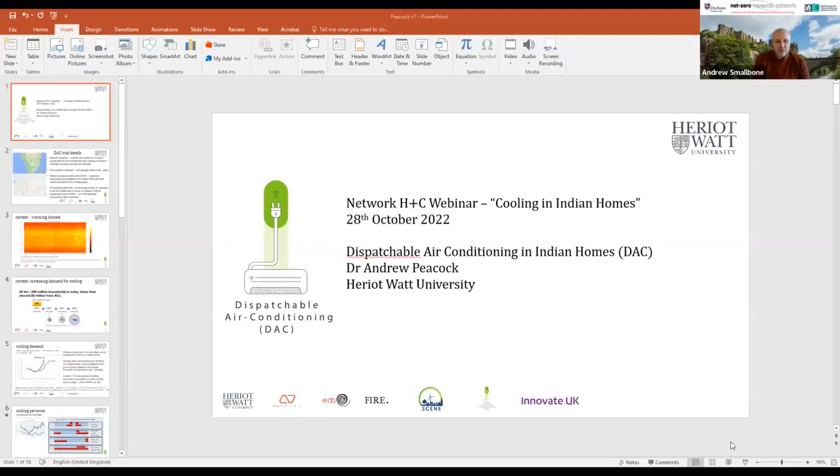We will now move to Andrew Peacock. Andrew is an associate professor in the School of Energy, Geoscience, Infrastructure and Society at Heriot-Watt. His research interests include renewable energy generation, energy management, and energy efficiency in buildings, and he is a co-I of this network. Andrew will be talking about dispatchable air conditioning in Indian homes, DAC, which I thought initially was direct air capture, but it obviously isn't that. It's dispatchable air conditioning in Indian homes.

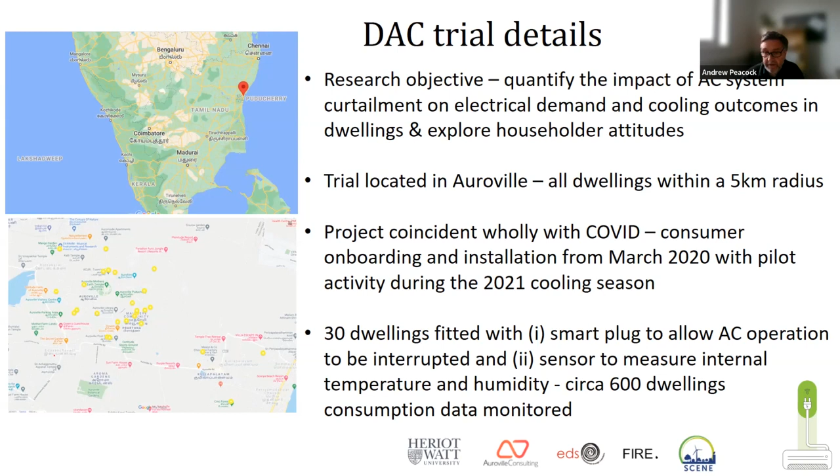Auroville was the location. So Auroville is, for those of you who know India, about a 4-hour drive south of Chennai in southern India. So climate on the coast near Pondicherry, and all 30 dwellings were within a 5-kilometre radius. Just a bit of context, we accessed 30 years of climate data for the region. We were interested in some of the comments coming back from the workshops that we had, that they were seeking to access AC systems because it was just getting too hot. As David says, in this community, the use of AC was eschewed for sustainability reasons, but people were starting to access it because it was getting too hot. So we wanted to analyse that.

What this graph shows is using Moran's environmental stress index. Each box represents a day of the year, and we can see 30 years of data on this. Where it's yellow, it's showing a more extreme environmental stress index. So towards the right hand, from 2014 onwards, we can start to see much more yellow appearing, and that growth in the summertime climate.

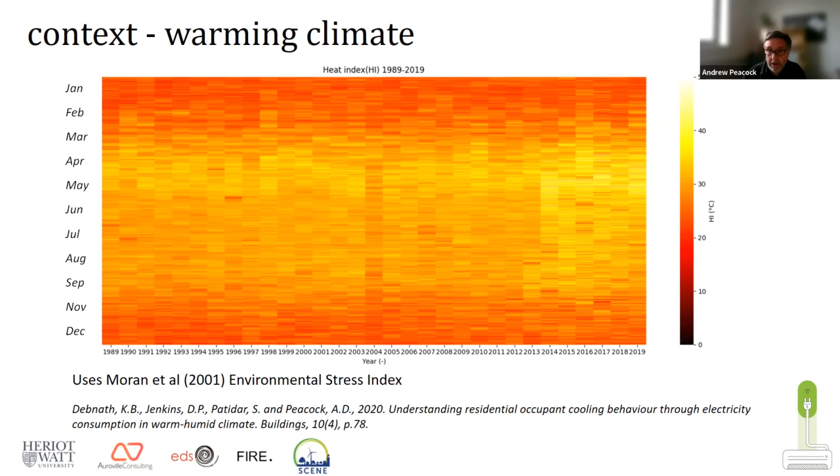So they kind of felt the feelings of people were reflected in how the data was turning out. As David says, the other context is in forecasted massive growth in AC systems. A lot of this stimulated by policy to a certain extent, obviously also by economic conditions. But there are policies in the Indian Cooling Action Plan to try and deliver thermal comfort for all, for instance.

The changing climate in India, to some extent, makes some form of mechanical cooling a necessity in many of the dwellings in India from a health perspective. As you can see, dramatic rises. I mean, just really, really crazy rises that are going to really stress the Indian grid if nothing is done, if it's all fit and forget, if nothing is done to manage rollout of these systems. Obviously, climate is a forcing factor.

We were able to access some data from Delhi here for a single feeder, just to try and understand where AC systems are currently running and how cooling is currently affecting the grid. So this is a single feeder, about 685 dwellings on this feeder, each dot showing average electricity consumption on that feeder. And you're able to discern the monsoon and dry cooling forcing temperatures, different associated with how much humidity is in the air in the monsoon and the dry season. So getting up to around 20 kilowatt hours per dwelling.

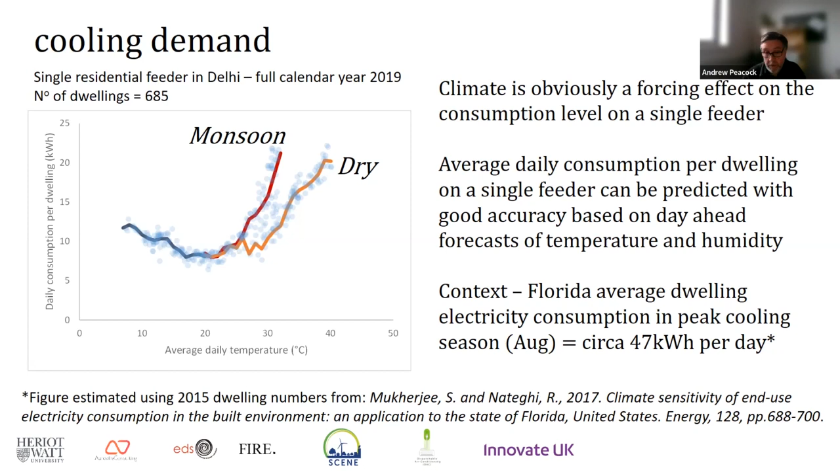So there are many areas in Indian cities where you're starting to see Western style consumption levels, although nothing as big as what we're seeing in Florida, which is shown as a kind of context here. From the data that we analysed from the dwellings that we monitored in India, we were able to start to discern cooling personas, which was interesting to us.

We can see here average dwelling electricity consumption derived from aggregate data, where in March we see very little AC consumption, mainly concentrated around night times, a little bit in the afternoon, and that growing, as one might expect, as the cooling season becomes more severe towards mid-May, which is peak cooling season. We were able to kind of poke about inside these average data to start to see different personas, so how people transition from that onset of a cooling season into peak season.

And we could see these types of arrangements where we had daytime extenders. We had people who extended it from daytime usage to daytime and nighttime. We had nighttime extenders, so they never used it during the day, they only used it to help with sleep. And then we had people who at peak season had the AC system on continually through the day. The middle two, the daytime to nighttime and the nighttime extenders, are the biggest groups.

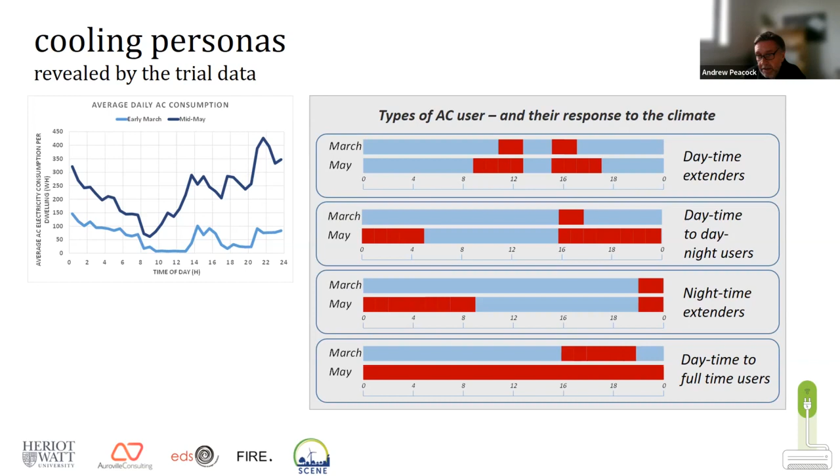So what do we do in our control platform? The curtailment methodology that we alighted upon: we had all sorts of ideas at the outset of this that we would use sort of MPC approaches, where we would be doing a lot of heavy data analysis of incoming data to try and understand how people were using their AC systems and then try and control them almost discretely in each dwelling. That was all made very, very difficult because of data issues associated with using customer Wi-Fi. So we came up with a much more lightweight way of proceeding.

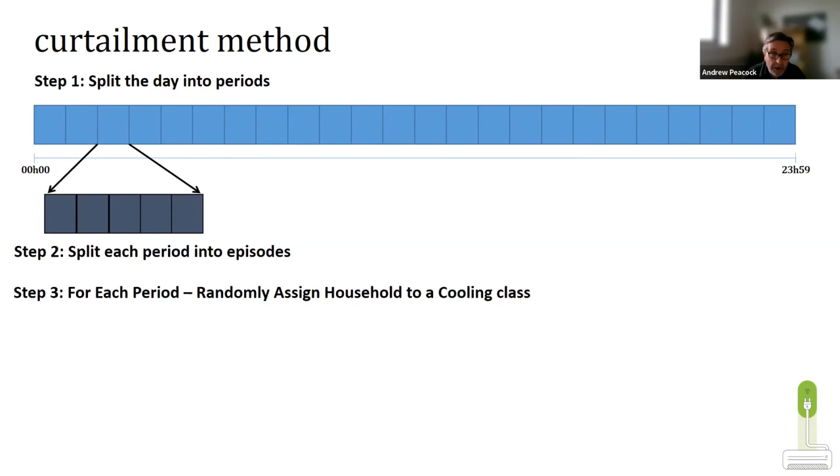What we did is we split the day into periods, and each period then into a series of 5 episodes. And we randomly assigned each household to a cooling class, and each cooling class had a severity of curtailment. We played about with this a little bit, but in the example shown here, we had 3 different cooling classes. The first one had curtailment in 2 out of the 5 episodes. The most extreme one had curtailment in 3 out of the 5 episodes, and cooling class 3 just rode through, had no curtailment at all. The cooling class dictated the severity of the cooling constraint.

In each of the red blocks, we switched the AC system off. We had to analyse how we went about doing this to try and overcome local control management issues with the AC systems themselves. When you switch an AC system off, it cools down for a period of time before you can switch it back on again. So that led to how long each of these episodes were, and therefore how long the periods were.

So analysing the AC systems that we found in the participating residences, we found that an 8-minute period allowed for that cooling down period. So our episodes were 8-minute episodes, and 5 in each period. The periods were therefore 40 minutes in duration.

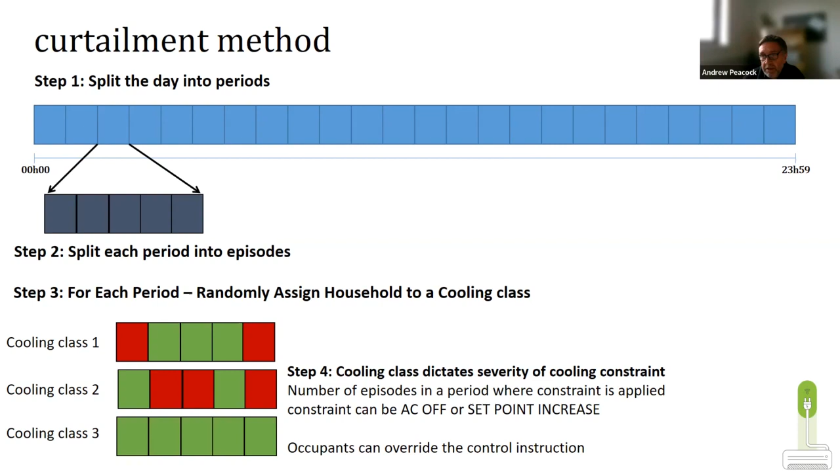Auroville is, as David mentioned, an intentional eco-village. It's invested heavily in PV systems in its grid, and during the daytime, when there was a lot of PV generation on the go, the grid got pretty dirty. So we got a lot of voltage instability, and many of the AC systems that were installed with inverters had voltage management on them. So they were effectively self-curtailing when the voltage went outside certain limits. So we were unable to discern the extent to which that curtailment was because of what we were doing or because of what the grid itself was imposing.

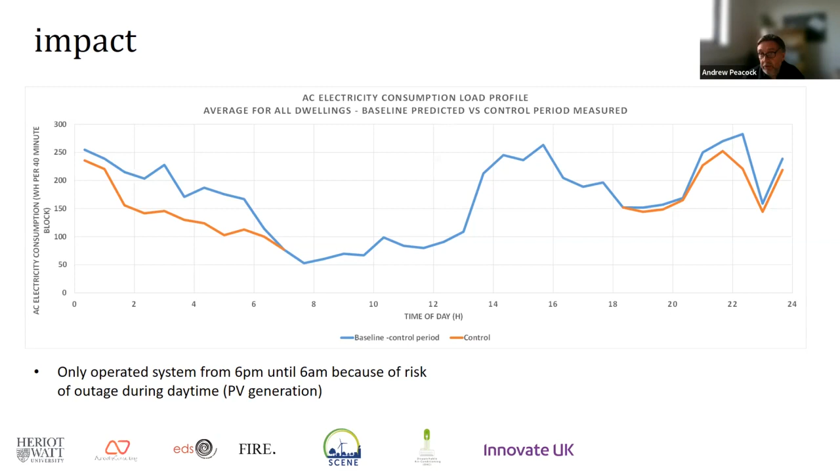So overall, in terms of quantification, what we saw was a reduction in energy consumption of 21%. We can see a period of about 14 days here between the 19th and the 2nd of June. There's a couple of days hidden within that where we didn't do any curtailment at all. So that was us just kind of filling up our baseline data to make sure that our models of baseline data were kept consistent with the climate as it moved through the cooling season. In terms of load reduction average, we were seeing load reductions of about 23%.

And in a number of the dwellings, we were able to extract thermal comfort data. And what we were seeing was about a 1 degree increase in thermal comfort envelope, if you like. So the thermal comfort envelope widened by about a degree across the dwellings that we were monitoring. So, if you like, the quid pro quo: we were getting something in the region of 20% reductions in energy and power for a 1 degree sacrifice in thermal comfort condition.

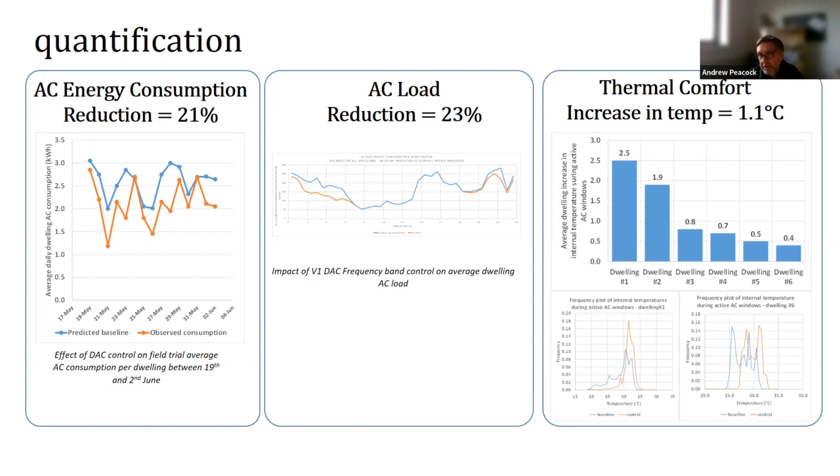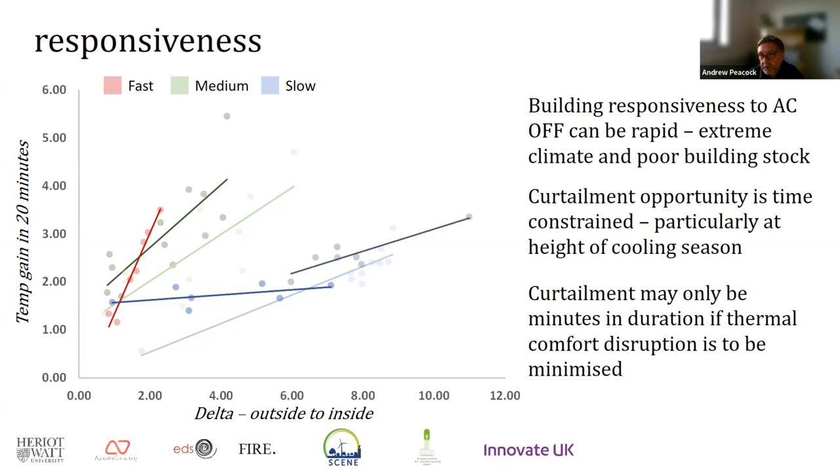It was interesting also, with some of the data we were able to start to look at how responsive the buildings were. So we could see fast, medium and slow responses. The graph here is just showing, at different external temperatures, how much temperature gain you could see in the building in 20 minutes when you switch the AC system off. Some of these buildings were extremely responsive, associated with building fabric, but also associated with behaviour, particularly with respect to ventilation in each of these dwellings.

We also got involved in a number of behavioural exercises. Some of them were shared behavioural evaluations with the CEDRI project you just heard about. It was interesting with respect to the way in which the deeply held sustainable pro-environmental values held by many of the residents, or indeed all of the residents in Auroville, started to fray as we moved through the cooling season. So they started to eschew pro-environmental behaviours, manifested, if you like, by minimising energy consumption. And what overtook that was a requirement to have situational problems solved, i.e. it got very, very hot and I need to have cooling, thank you very much. So we saw quite a lot of that, and that was also reflected in workshop activity that we had. As I say, we saw it in the data as well.

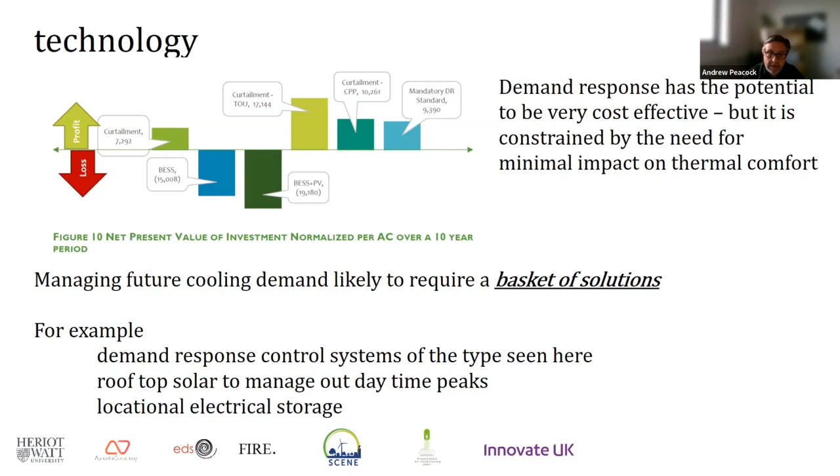And their modelling of the DR approaches found it to be very cost effective. But I think their conclusion, as one might expect, is that to manage the scale of cooling increase that's going to be in India will require a basket of solutions. And some examples of them are shown on the chart.

Just a word about regulation. We worked with EESL and with the national government in Delhi to explore options for regulation of AC systems. It's quite a hot topic in India. And obviously one of the problems with regulation is just the length of time it takes to do it. It's interesting to look at the 4755 standard in Australia, which started its genesis, its discussions, in 2004. And even today has not arrived at a satisfactory description of how that demand response mandate will roll out towards Australian AC systems.

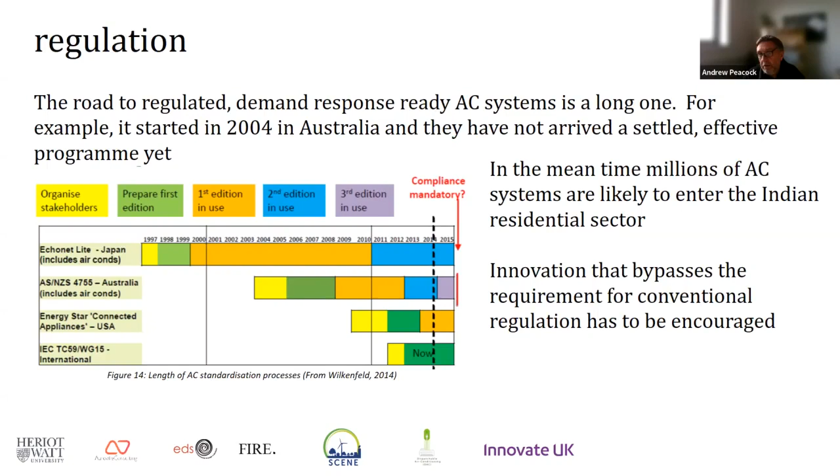So it's mandated that the AC systems in Australia have to be demand response ready, but the way in which that demand response programme is going to operate to actually deliver real results has not been concluded yet. And most of the pilot activity around the way that demand response mandate is currently described in regulation does not save anything like the energy or power that they were expecting it to. So it's a long burn.

Well, you could fast track trusted approaches for ensuring measurement and prediction so that bespoke locational demand response programs can start to be implemented. That might be at the level of development. We talked a lot to developers of housing systems in India, and they were very open to the idea that they could start to put DR systems into AC that they were installing in those developments.

But overall, policymakers, grid operators, and utility program designers need to start to explore how they can unlock flexibility as a core asset value within overall system planning. But overarching all of that is a requirement to see very innovative methods of consumer engagement to make sure that we're bringing consumers with the innovation so that as it lands, it's adopted and fully trusted and used to its maximum value.